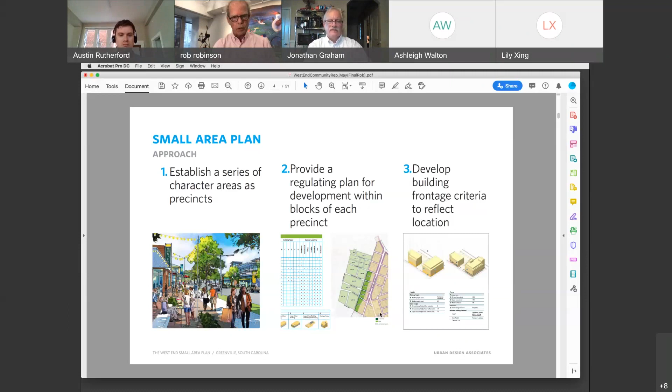There are other components too, for sure, and you've identified some of those: infrastructure improvements, safety improvements, access improvements over time. We talk about that within each of the precincts and the overall West End as an ancillary portion to this regulating plan and block typology plan.

So in thinking about building types, I just want to pull this up a little bit so you can see how the matrix starts to work. In many ways, residential buildings are a piece of their own, particularly for single family or smaller residential building types, whether they're single family detached or they're 2 units put together or 3 units put together.

And then they start to jump up in scale. So you might have small apartment buildings or condominium buildings that can fit into fairly typical lot patterns within a neighborhood or on a corner, or where the street turns to be a bigger, more active street. So we tend to go from mama bear, baby bear, papa bear kinds of sizes, things that nest within different contexts.

In different ways, so they're small and medium in the residential typology. So for instance, if you're doing really urban townhouses, and there are a lot of them and they're all attached, that would jump up into a medium category. Small tends to be more related to the single family house, so it grows from there.

Small urban buildings can be mixed use. They might have a little shop or an office on the ground floor, and it could be all offices, it could be all commercial. The idea is that it's really the building type we're focused on, the size and how it can fit into existing block patterns.

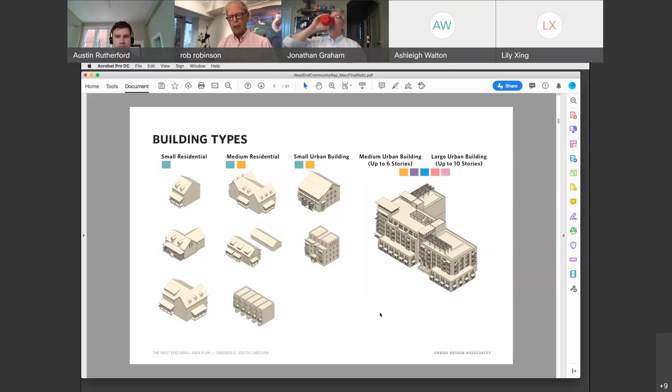It's more at home in some precincts than others. Rather than just being open-ended about uses or building height, as we go through these exercises with this fine-grained network of colliding street grids and odd sites, we think it's better and more predictable to think about building typology and where they really fit, rather than just size.

So there are other factors here, and this demonstrates the difference in scale. A lot of what happens in your C4 and the downtown design guidelines starts to address this, but we don't have anything like this for neighborhoods. When you get to that scale outside downtown, what do different building sizes need to do to speak to really different scales across the street or adjacent to them?

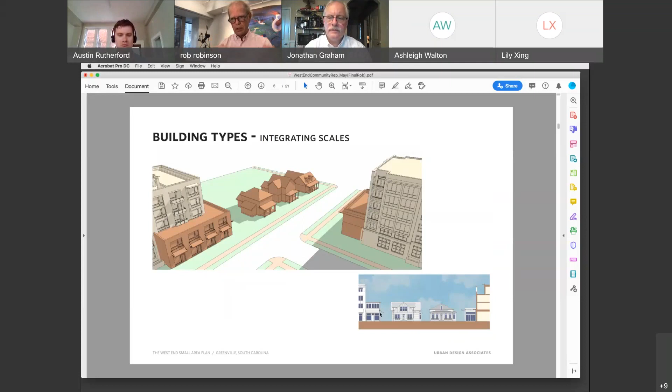You can see in this one, demonstrating that if you've got a small apartment building adjacent to what might be a much finer grained single family neighborhood, we find that by repeating those elements and bringing a larger building into scale with what's around it is a really important massing technique, and you use it a bit here.

We've gotten very specific about this on addresses like South Main Street and Augusta, where it's a stated goal to keep new development reflecting the context of legacy development that was much smaller in scale. So we'll see a little bit of that here as well.

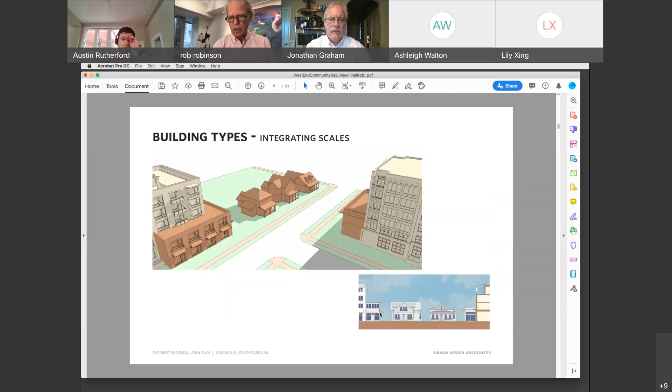But this is a menu that we're building. These are just demonstrations about how we're thinking about it, and then we'll have more meat on the bones for actually what step backs mean, how deep they might be, and what the adjacency equation looks like next to existing buildings.

And then in the master plan recommendations, we've typically been looking at where we know there are vacancies. Some of them have proposals, some don't. So for instance, in...

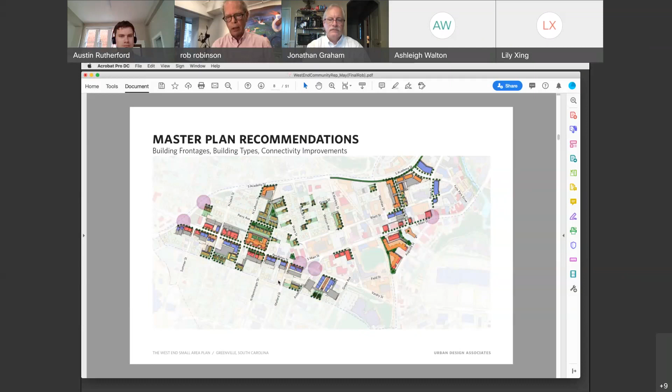So that would be a change in both development criteria and policy going forward. And it needs, if we're going to do that, it needs to be very clear and hardwired into the toolkit as it evolves.

The other element we focused on, coming out of your comments over the last couple of months, was improving connectivity and particularly the pedestrian experience. So big moves like getting out a bit and looking at what, for instance, Pendleton is really connecting, and what it continues to connect in the future, from the hospital property to West End Village to Vardry and Augusta and the stadium. Those nodes we think are pretty important.

As sites redevelop along the Pendleton corridor, there could also be a kind of constellation of new little centers along there, because some sites are quite big, while others may just develop incrementally as the fabric in between. So Pendleton here on the connectivity side, in the big picture...

The desire was to add much better bike connectivity and a much better pedestrian experience along that street. How could we do that? Slow traffic down as it comes through the neighborhood. That's a big piece of it. You see the little dots for making sure you can cross at these intersections, and they may need some tinkering to make the geometries work and make the intersections better.

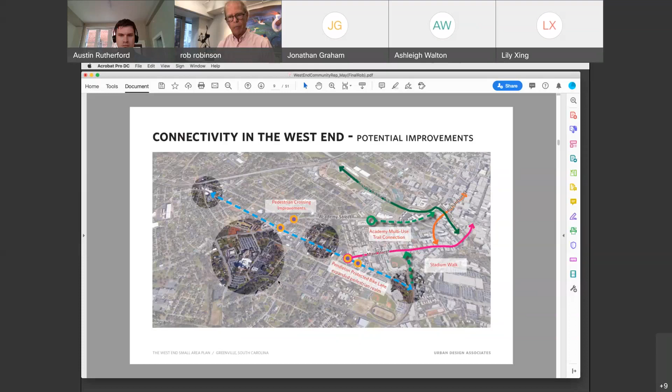So that connectivity idea—can we change the paradigm by thinking about multimodal connectivity, like bike and pedestrian traffic, in a different way than we're thinking about it today? Are there opportunities for that? As we look at this Academy Street frontage, as it courses on the north side of the West End neighborhoods, I think there's a pretty good opportunity to begin thinking about that whole edge differently now than you do today.

So we started, at our last meeting, just mapping out what seemed like a reasonable pattern and edges for these different precincts. We included in this original one the notion that while Sterling neighborhood is not part of this planning effort, they're really going to be affected by the changes being presented here. As we think about what's happening on Arlington Street, or Arlington Avenue, one street over from Pendleton, that's very much tied to that Pendleton future, so there'll need to be some socialization of those ideas. And then how these overlap and interact, we've been talking about.

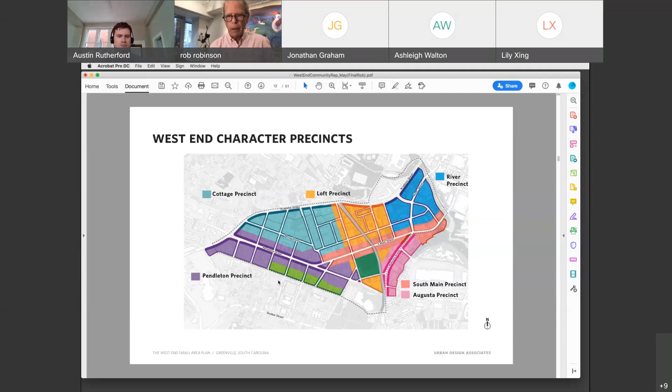So we'll run through this a little bit about how we could see the system working and talk about opportunities with that. When we talked last time about the river precinct, knowing that studies are happening all the time, but now thinking about what might happen along the riverfront and what is currently parking, conference center uses and that sort of thing.

But our focus here was over the long haul as this little precinct builds out. The idea for us is that the most important thing is that we have great streets, great street frontage, active streets. When you can walk around the block and it's whole, and it's full of active uses and making great public space throughout, that's when a neighborhood and a little precinct gels.

So there are some important streets. We thought that River, as it comes through, connects to Richardson going across into downtown, is one of those citywide gateways that comes into this precinct. So the opportunity to get building frontage over time as these blocks develop would be a priority on River Street.

The same for Falls Park Drive. As you come in off of Academy right now, it's a lot of parking lots there. If those ever redevelop, then with buildings, it would be important to claim that gateway and that sort of crossing with River Street as an important face of the neighborhood, and to complete those street frontages so that we get a place that gets connected up.

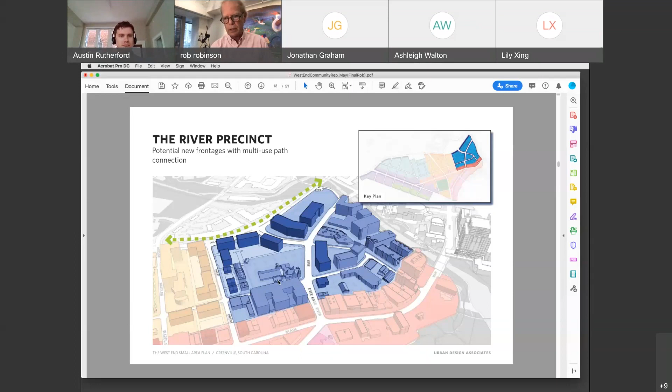So when we talked about this last time, this is a compilation of the comments that add on to what you had already told us in the very first meeting. So this notion of preserving existing character and scale was important.

There was a sense too that while the river gets a lot of attention in this precinct, that continuing the pattern that has happened to date, where you get these great little public spaces and tucked in plazas, that should continue through that precinct. So we continue to add additional amenities like that for the West End.

Folks were not happy with the notion that you can turn a block and you run into a sea of surface parking lots, that it really creates a disconnect in the way the district lives and feels. So keeping parking away from street frontage is another way of saying putting buildings or public spaces as that street frontage, and let's keep parking as a secondary use as much out of the public realm as we can.

And then extend these pedestrian connections wherever we can do that was an important element from the response for this group. So we proposed these urban design recommendations last time that we were together, and this notion of continuing the river precinct is probably the most...

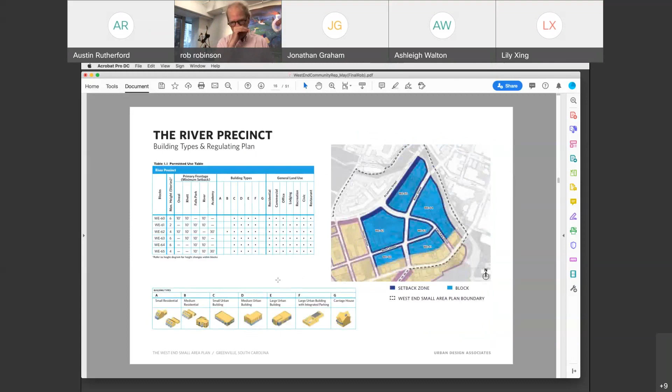And then again, building public plazas into the precinct where possible is pretty important. So if we take this little, let me blow this up a little bit so you can see it.

This idea of a regulating plan and building types, these sort of three things go together. You've got a regulating plan that identifies the block number, and you can see the frontages, the street frontages that flank each of these blocks. So building types and setbacks and building heights in particular, we haven't done a height map yet, but we're just sort of trying to work through what makes sense within these blocks.

This will start to get codified. In the little matrix here, block numbers are on the left, and we talk about maximum height in stories within each of those blocks.

We look at setbacks on all the surrounding streets, and talk about what are the appropriate building types for this district, or this precinct, and begin to put in our thoughts about those.

Then general land use, not to get really specific, but this is probably the most mixed use precinct in a way. The Loft precinct is pretty close behind, but it's almost all of the general land uses we think would be appropriate here—everything from restaurant to civic or institutional uses to hotels, office, commercial, mixed use, residential. So it's got a pretty big breadth in the river precinct.

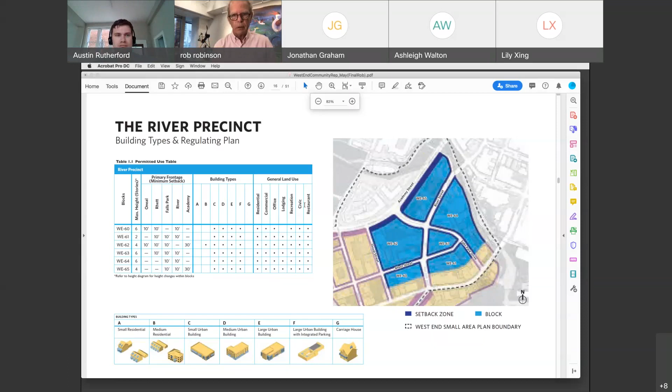With each of these buildings identified on the page at the bottom, some of those are placeholders now, but those will be key to a whole section within the small area plan that talks about building form, building massing, footprint size, response to adjacent building types within the neighborhood, so that we get a finer grain picture of what we're trying to do in these neighborhoods, particularly when they cross over between different street addresses, or turn the corner from Academy to River Street, for instance, or to Falls Park Drive.

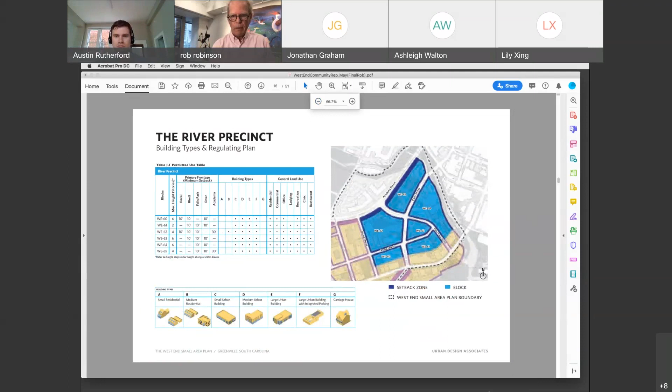So that's the river precinct as the first kind of example. The South Main and Augusta precincts are sort of twins that have really similar scale and character to them, and define portals into the West End.

In this one, as it surrounds and comes, these sort of embrace the stadium, which we were talking about today. I thought there was a really lovely sentiment that this great public space you've created here is the kind of front porch, the big front porch for the whole area.

I love that, because these kind of amenities and assets are often where communities come together for many different kinds of events. And the fact that these two little precincts sort of create many of the addresses there, I think we're lucky, because it creates kind of rich context.

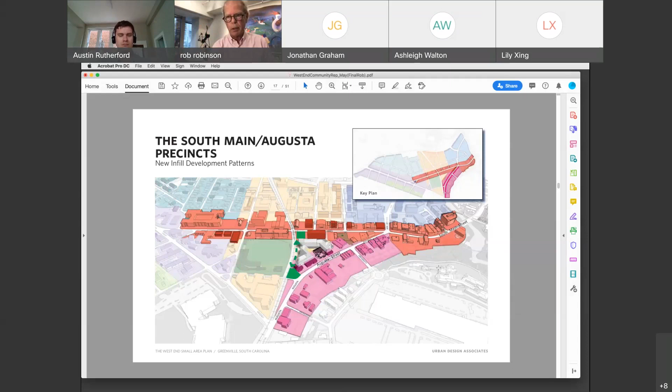You can see the little green arrow and the two green dots. This shows up in a couple of diagrams, but that was the Stadium Walk and the proposal for two new neighborhood parks within the West End as part of the redevelopment that can occur there.

Your feedback to us was consistent after we looked at this the last time. It was preserve this building scale, and let's try to get—there was overwhelming sentiment for, like, what happened to the art scene here? We have the West End Village. It's wonderful, it's funky, but when you get over here, the connectedness to that, or the idea of that,

is this sort of fundamental component and personality of the West End. Are we losing it?

Can't we look at these precincts, which are these collections of both funky historic buildings, legacy buildings, smaller scale stuff, as having more art-centric uses, and begin to treat buildings, you know, a little bit as public art as well.

Open space has come up in a lot of discussions. We need more finer grain, neighborhood scale public spaces that people can use deeper into the West End neighborhoods. And then that same kind of rallying cry to enhance the pedestrian connections along here.

A lot of that was about eliminating the vacant parcels and parking lots in between, because people sort of come across South Main, even Augusta, at the Greenville Transit site, and you quit walking—that last active use.

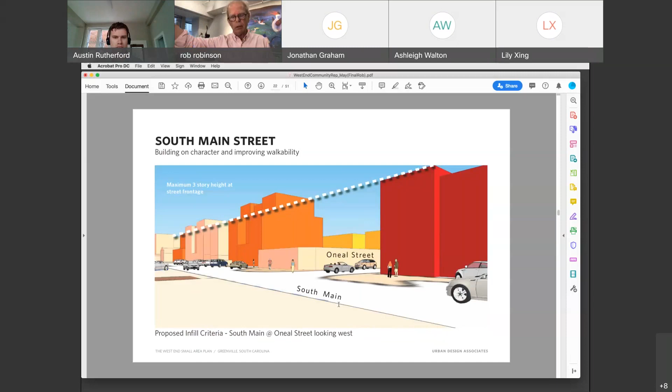If we look back at what had been developed over time, there's one sort of four-story building. We're suggesting that at the street front, maximum three stories. And if you're doing four or more, you're stepping back a prescribed amount before you get into taller building masses.

When you look at what that could create, there are two things at play. One is we're just crossing in on South Main to what we identified as the Loft Precinct, formerly known as the Warehouse District way back when. The idea is that those buildings would begin to reflect that location—as we get closer to the stadium, closer to the legacy warehouses, the architecture recognizes that and becomes part of that place.

It may be different in the River Precinct, where it's more eclectic, with more urban things happening. But as we get deeper into the West End, that flavor could change—these smaller buildings could take on the personality of simpler, more industrial era architecture while having completely new uses.

That's the way the building type regulations can work, and it goes into each site.

Looking back the other way—we looked at this last time—there's an empty site now, with temporary surface parking right by the tracks, right by the stadium. The cigar warehouse is across the street on our left. It would be the same rules: the frontage along South Main is going to be the scale of one to three stories, and if it's part of a bigger building, that steps back away from the street. So what you feel and see as a pedestrian on the street frontage is that scale, and it works really well.

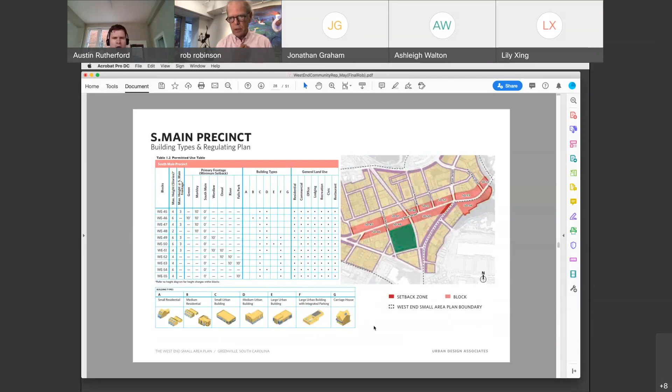Same sort of methodology. We go through, label each block, think about those setbacks, maximum height, number of stories, and the range of uses and building typologies that could be in the South Main precinct. Same thing for the Augusta precinct, which goes block by block, and sometimes a little smaller where the blocks are divided.

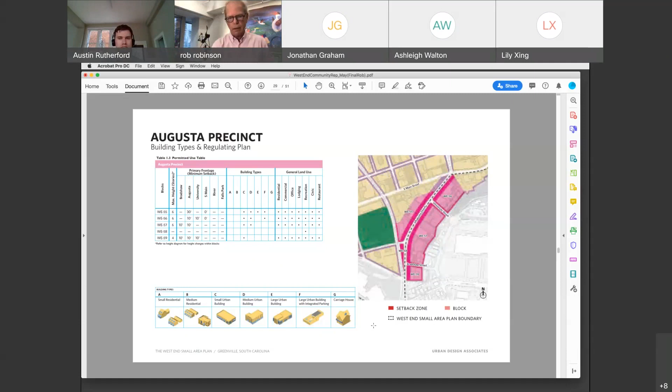On the north side of Augusta is where we can get this expanded pedestrian zone. The south side is a little locked in by existing building patterns, so you can't really do that continuously, but on the north, really control it from South Main Street. There's some existing buildings where it hits South Main Street, but as you get to Jackson Way and the stadium, that deeper setback and the park spaces are very much part of that pattern. So those frontages, we think, contribute heavily to this idea of the loft precinct, of which the stadium is the center.

I was impressed the first time walking through here, as you walk by those great old buildings that have been reused and retrofitted for offices, restaurants, and event spaces, along Rhett Street and South Main. This idea of the stadium and the stadium precinct as the full expression of this legacy warehouse district makes, to me, perfect sense.

And the fact that you can rebuild a kind of ethic and sense of place in neighborhoods that are developing all over. But you've got to tell people, you can't hide. That's not a nice-to-have. It's like, we like this, this is how we see ourselves, we like building on that character. I think the buildings going in just south of Field Street, adjacent to Augusta and Vardry, that architecture does that. It's evocative of that era and that type of building.

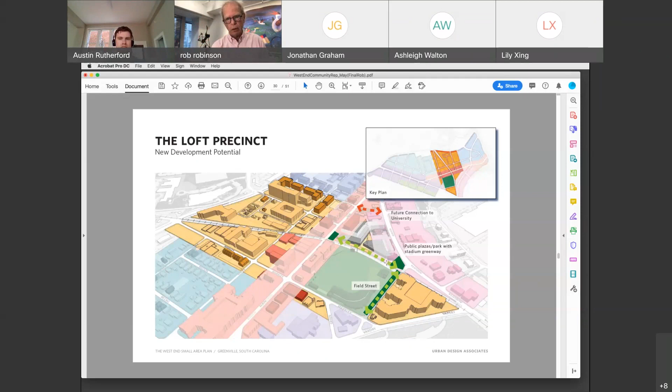One thing we want to get set is that in order to do that, we really need setback from the railroad right-of-way, and the building faces need to be located thinking about the height and character of that space. Again, thinking about the building patterns within the Augusta triangle and the relationship to the surrounding building stock. So consider this appropriate scale along the pedestrian edges. Let's look at the character here, preserve and add green space where you can, and improve the way pedestrians can

negotiate all these connections. So when I look at the architecture being built now, and some of the work already built along this corridor, it's really exciting because you can see that some buildings really took that to heart and responded to it. Others, not so much. So we think this is something you may want to consider moving front and center as part of the redevelopment ethic here.

So again, preserve and maintain that South Main Street character, integrate more public spaces, provide the expanded pedestrian connections here, and break down these larger building forms into more distinct, smaller, and responsive forms. And let's start responding—whatever we do new, let's consider the DNA of this industrial legacy along the tracks and build that into our thinking about character.

So when you're in the air looking over the stadium north, you see South Main and Augusta Street, this idea of the loft precinct finding a complete form with the stadium, and what's happening with South Main and Augusta frontage going from smaller scale to bigger buildings maybe enmeshed in the middle of the Augusta Triangle building. And you see the park space at the corner down here of Augusta and Field Street.

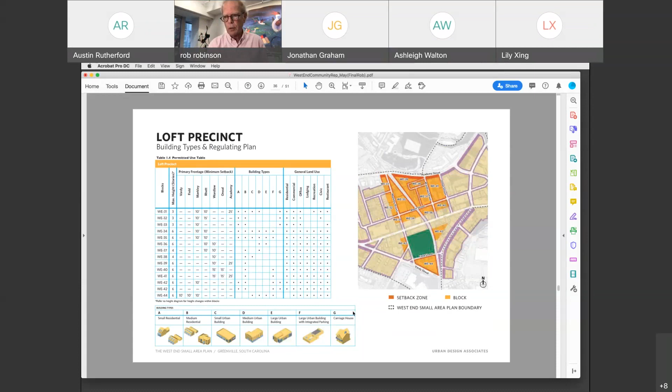So we've been suggesting a bit deeper setbacks than the zero setback that is the default for a lot of these blocks, and then you move from there. It might be more appropriate for this kind of district to have a bit more landscape and breathing room, a bit more transition between the tinier sidewalks and streets and that private space.

So that's the loft precinct. The cottage precinct—we updated that diagram, we always had a new street going through the middle, which is still part of the proposal there, and then infill along Academy, which is bigger multifamily, a little mixed use on the ground floor facing Academy, and then infill patterns of attached housing and smaller stacked housing, townhouses and apartments above. So you can see how that fills in the block between Ware and Calhoun, with proposed new frontage along Perry, thinking about the building typologies for that and how that becomes part of the character and image for the cottage precinct and stays in scale.

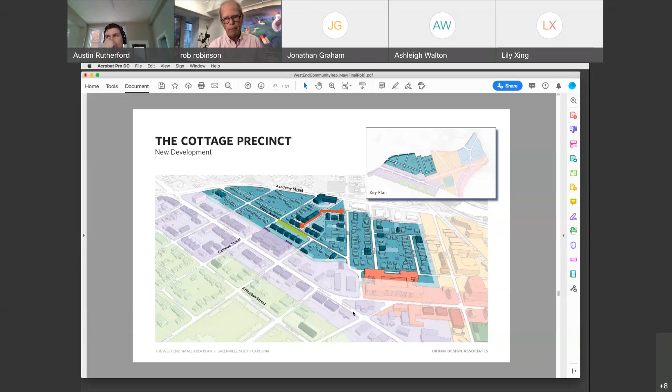As you look at the eastern part of this precinct, they're tiny blocks, very narrow blocks, and the houses get a bit smaller there. Thinking about how that evolves over time, we're still at the same notion that it fills in with buildings that are sympathetic in character and have a cadence that holds together a little cottage precinct like this, versus replacing everything with larger scale buildings that completely obscure what it was in the past and how it's growing today. So this provides a foil in a way, a differentiation to what's happening beside us in the loft precinct or the Pendleton precinct.

So as much as you can, small scale development to match existing scale and character. Let's extend street lighting and improve the sidewalks and connectivity. Also at major intersections where people are trying to cross, let's work over the next few years to get those improvements identified and implemented. And then how can we bring park space into redevelopment opportunities within the neighborhood?

So those were really right in line with the notion of urban design recommendations here. Let's stay within the scale and character and make sure we're backstopping these patterns and creating whole places. And when we do transition between different building types, like when it becomes a bigger multifamily or mixed use building adjacent to these, let's really work on the transitions that happen between those.

We've got commercial buildings on one side on Pendleton. There's all kinds of things that happen in the back of those buildings, like trash pickup, lighting, and privacy screening. Let's get very specific about those as this moves forward and begin to nail that down as well. So we looked at one—this is why we like small area plans, where we can imagine a future scenario and get both the master plan and the toolkit set up to accomplish these things as properties come online.

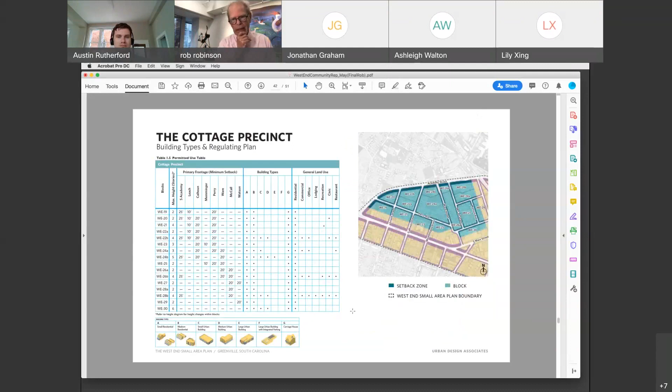And so we looked at this cottage precinct, as we're calling it, in finer grain detail. We had gotten back some comments as well, which I think were really helpful to us. This requires a little more nuance in breaking down blocks into finer grain components, where right now you may have development that's really going to be oriented to Academy versus to an interior street where it's facing single family residential. You're always having to deal with adjacencies, but understanding that the uses may be different closer to Academy, as they have been in the redevelopment scenario up to this date, but making sure that those parcels that front Academy, if you will, are part of this.

We had sort of left them out largely before, where there were existing uses that were different than what's happening behind it. But as we move forward, you never know when those things are going to redevelop, so let's set the criteria for them now.

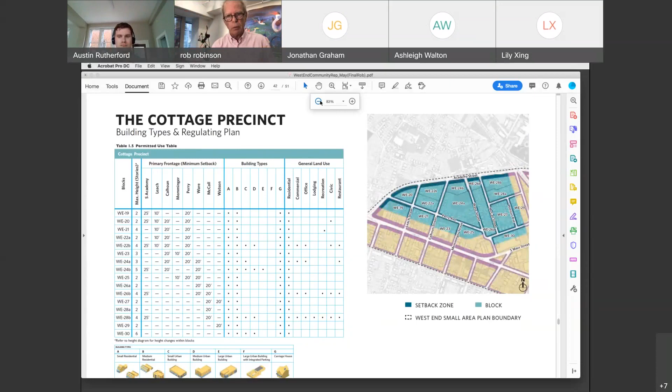So it gets a bit more fine-grained what building types are allowed where. And you can see just by the chart, when you look at the middle row of building types, we're largely all on the residential side here, in the smaller scale residential buildings or small urban building types, except when you might get adjacent to Academy where it really warrants perhaps a larger building than single family houses or attached housing. So this is something to take a look at as well when you're going through the proposals here for each of these precincts.

In the Pendleton precinct, we identified particularly where there were crossing challenges coming from the West End neighborhoods, both west and east, but a lot of this from the east side, that need to be dealt with. So we've been talking with the transportation staff and the planning staff about their thoughts about these and about how we might begin to think about physical improvements to remedy some of these issues. That'll be a menu that continues long after this plan. Our job is to identify it as a priority and make sure that we've got it on the agenda as the West End continues to develop over the years beyond this plan.

The other big recommendation here was that as buildings begin to and sites redevelop, is to begin to pull the buildings up to the street.

Let's start making a real street here that responds to both the character area-wide, the idea of uses that might be along here, and the change in access and traffic circulation, so that this becomes a safer and much more pleasant street for businesses as well as the neighborhood.

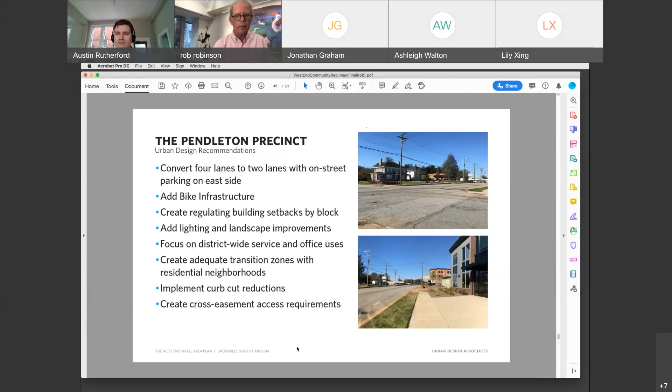That's got to be a front and center kind of criteria for redevelopment. So we know that you were successful, and the city was successful, even though this is a state-owned road, by redeveloping in exactly this way at the other end of Pendleton at the West End Village. So we were excited about that, and we said, let's just bring that show south all the way to Vardry and see what we can do here if that's a possibility.

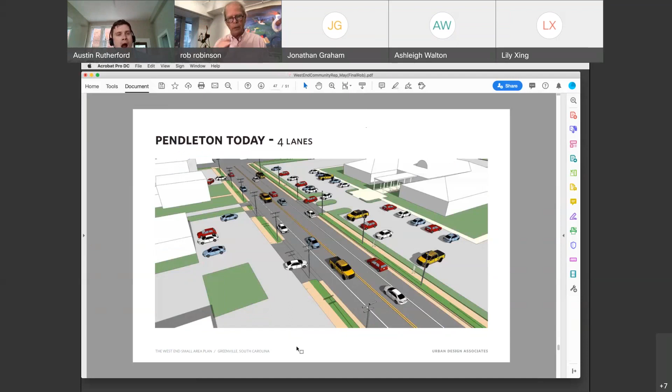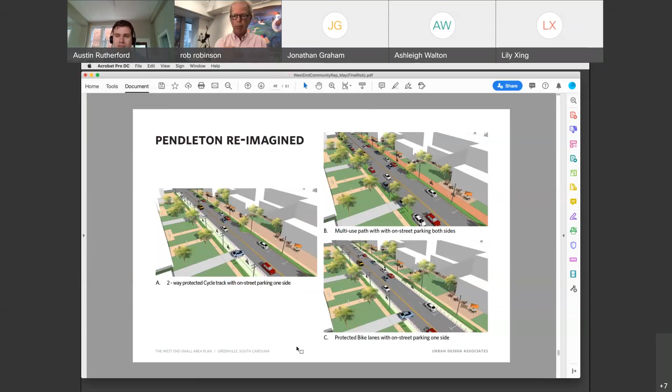So we started with this diagram showing just the 4 lanes and the parking lots that line it. And then we looked at 3 options here, just so we could begin testing them to see what works better, what could work here. How does the state feel about this kind of infrastructure within the state right of way, and begin to push this forward as a major redevelopment initiative along Pendleton.

And so we just took a little view looking north on Pendleton, on the right-hand side where you see the brown building, imagine that the state office parcel, that's right where this is taken, has been redeveloped. You see the cycle lane with a sort of green color on the western side. And then you see, in this block in the foreground, really deep setbacks to those buildings.

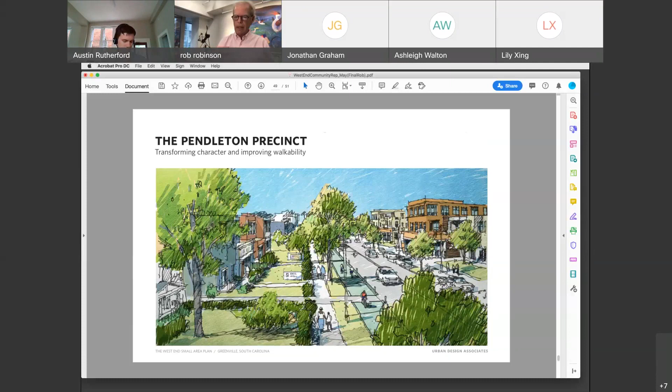Well, this is a block that happens to have some of those historic houses that have 50-foot deep, 40-foot deep lawns in front of them. And this may be one of those blocks where we really want to retain that kind of sense of place and that kind of building setback along there. And that could be hardwired into the regulating plan for those blocks. So each block is a little bit different.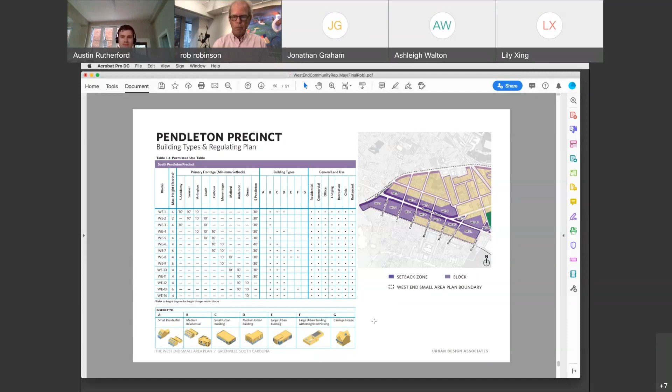You've got some really wacky patterns here, which go perpendicular to the street and have put in private parking lots, which function as little streets. The idea is that over time, when you have the opportunity to redevelop those properties, we change that pattern and get back to maybe pedestrian space or park space, but getting the access ways into a much more usable and functional pattern. So that gives you a lot.

Sorry to dump that all on you all at once, but again, we'll put this up on the website. We'll have the idea wall there that many of you have already used to give us feedback on what's missing, or things you liked, things you thought could be stronger, things you thought could be different. As we continue to work through this as an idea before we get into doing any kind of presentations to the planning commission, we'll continue to have this dialogue as this small area plan evolves a bit more.